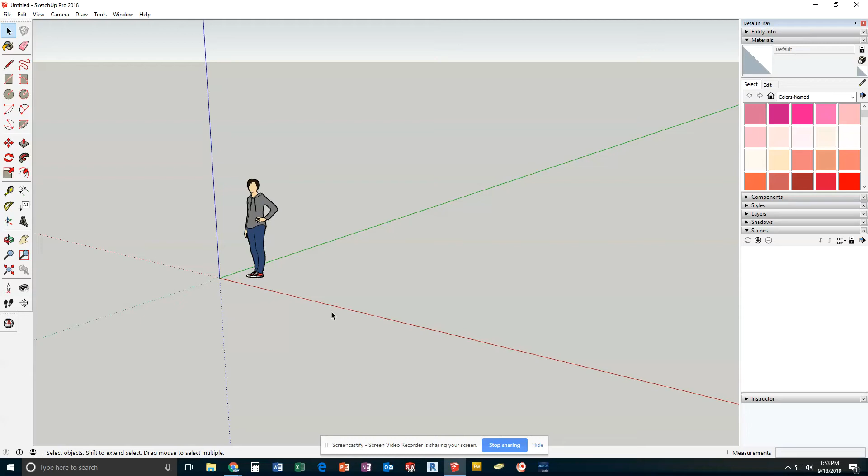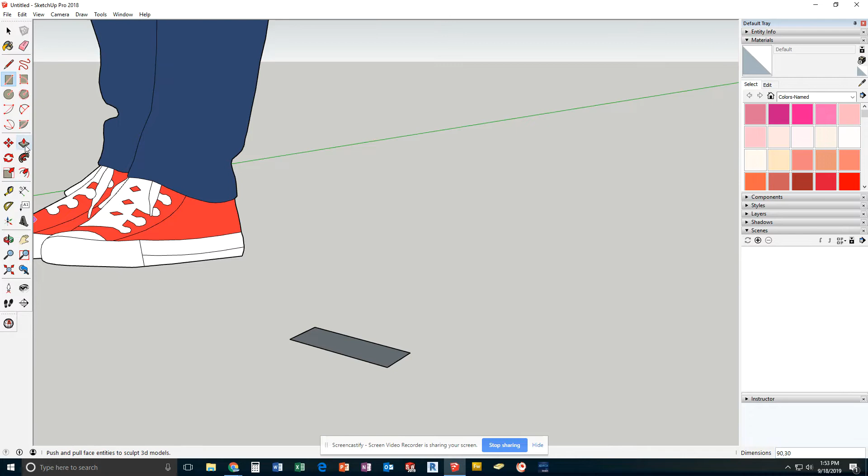Starting out in SketchUp, I'm going to zoom in near the feet of my reference person. I'm going to start out with a simple rectangle that will be 90 millimeters wide and 30 millimeters deep, which will give me this rectangle. I'm now going to use push-pull to pull this up 40 millimeters.

Now looking at the top of this, I'm going to go ahead and rotate my view up. I'm going to start to figure out exactly where to lay out the circles, because I've got one that comes up and two that get pushed in to create holes. I'm going to start out with the one that pulls up because it's actually in the middle, and that's going to be the easiest one to figure out.

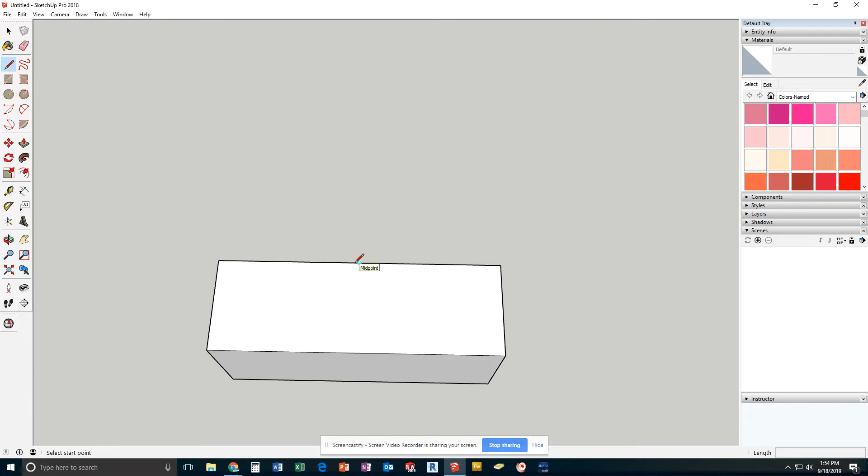To place it in the middle, I'm going to use my line tool, and I'm going to go along the line until I find this blue dot called the midpoint. I'm going to draw my line from midpoint to midpoint. Now some people would then try to draw another midpoint to midpoint line to create and find the center of that circle. It's actually unnecessary.

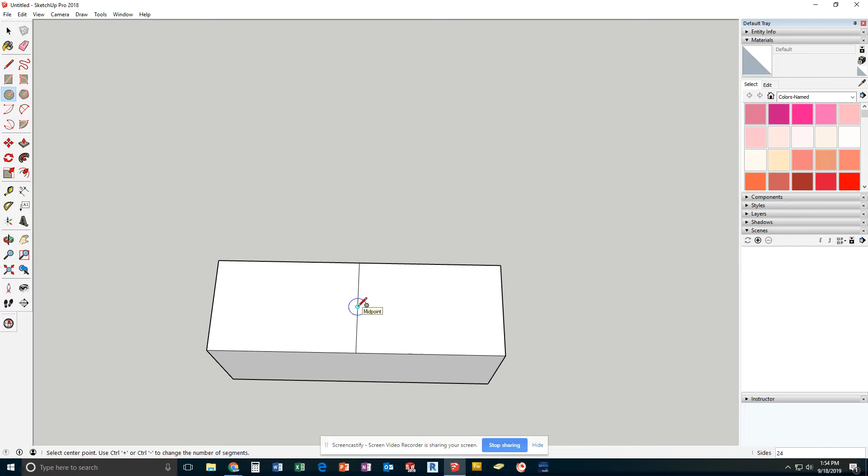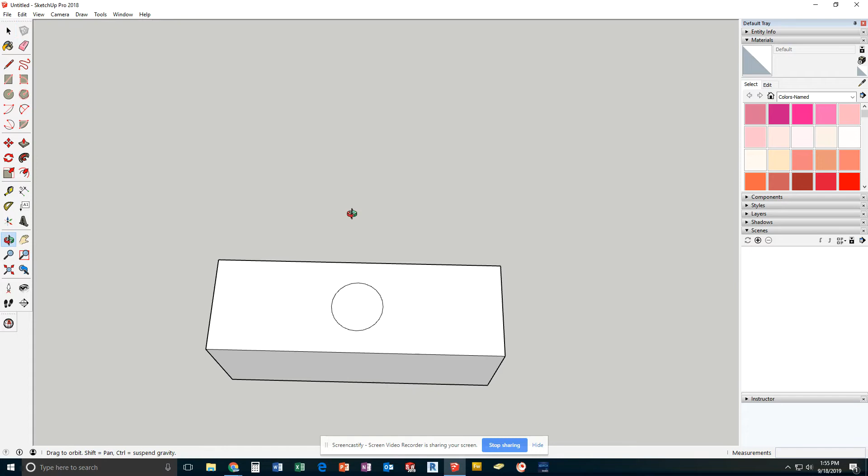If I just leave the one line here, what I can do is get my circle tool and come down to the midpoint of this line and then look at my radius. In this case, I measured my diameter as 16, so my radius is 8. I am then going to have to delete the 3 line segments, the one in the middle, the one here, and the one here. I am now going to grab push-pull and pull this up 12 millimeters.

The next thing I'm going to have to do is figure out exactly where my cursor or my area is over here. So I am actually going to draw a line from the midpoint in. Now as I look at my sheet, the center of the wider hole is 20 millimeters in from this edge. So I'm going to go ahead and make this 20 millimeter line.

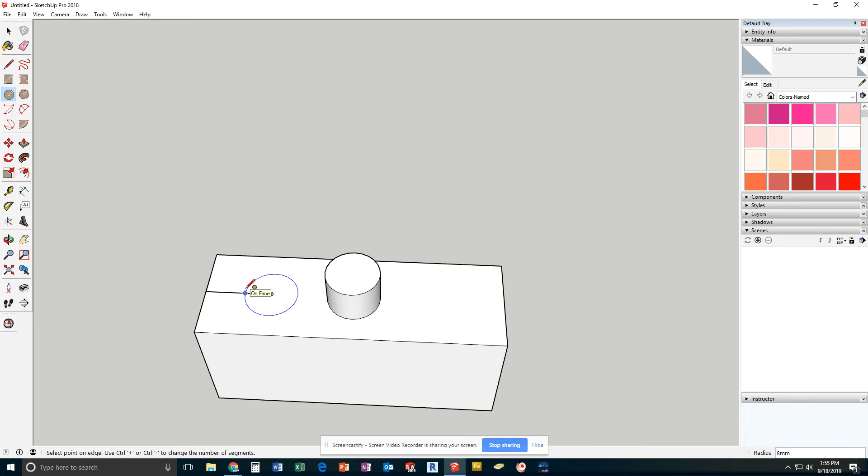Then I'm going to take my circle tool, start my line there, and come out, and the size of this circle was 18, or 9 millimeters as a radius. I'm now going to click this line and this line, get my push-pull tool, and pull this down. Now, while I'm push-pulling, I'm actually going to use the mouse scrolling wheel to rotate to the bottom, to come down and be able to click on the face.

That's how you can see that I come all the way through the hole. So I should be able to create this in a way where I see the ground. If you have to click on anything with the eraser tool, or click on it and press delete, you did it wrong. Don't do it wrong.

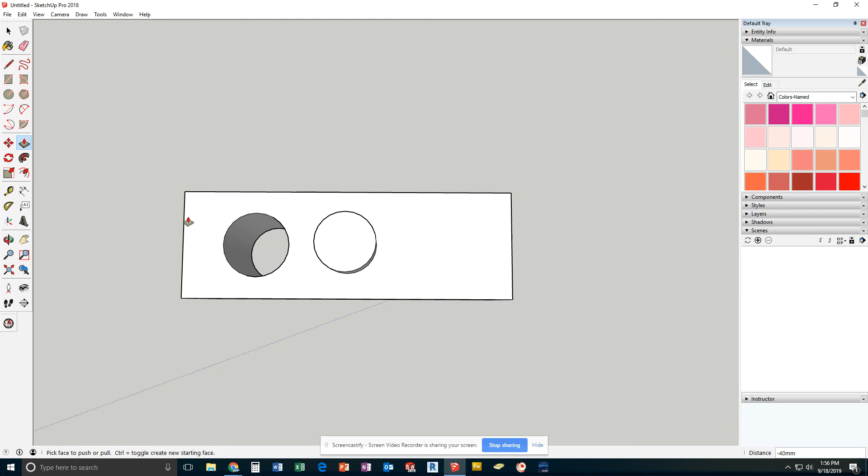The nice part about this is it was fairly symmetrical in terms of hole location. On this side, again, I start from the midpoint and come in 20 millimeters. I then get my circle tool, put it here. This was only a 10 millimeter circle, so my radius is 5.

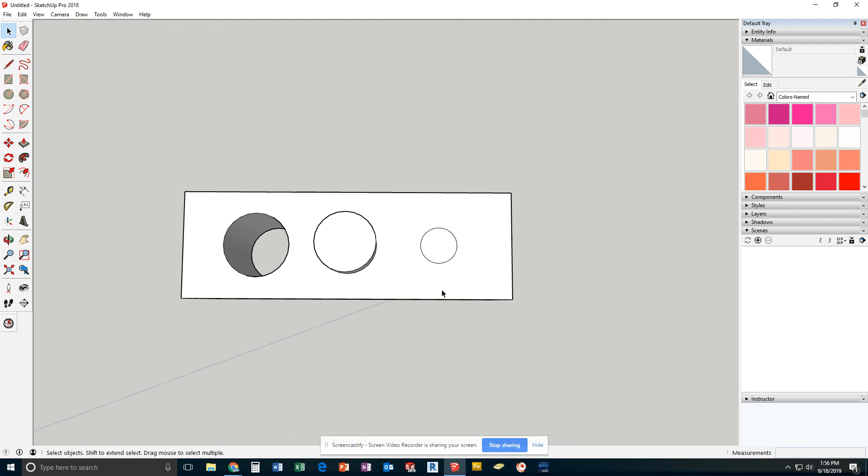I'm again going to delete the lines I don't need, carefully clicking on them, making sure they turn blue before I push the delete key, and then pulling this down 11 millimeters. This will create block C.

Again, I will use my pointer tool to click on and delete the person so that this is ready to be placed on a drawing.